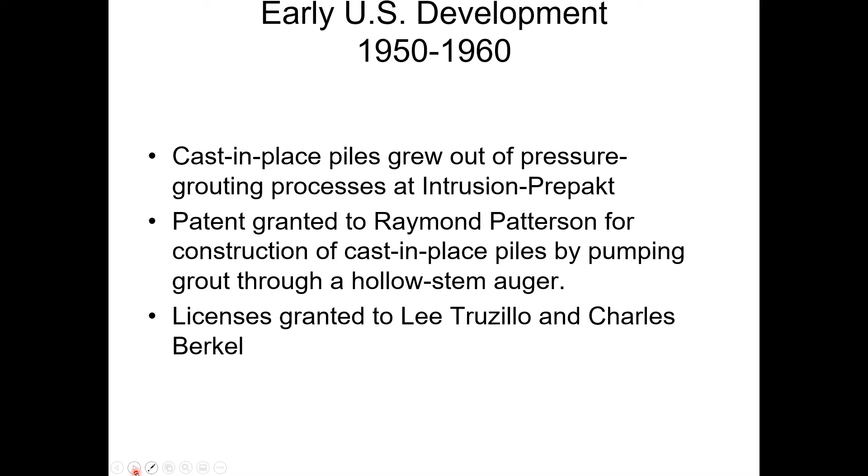So they worked on this process and determined it would be better if they could pump the grout through the center of the augers. They developed augers that would allow that, and a patent was granted to Raymond Patterson for construction of cast-in-place piles by pumping through a hollow stem auger. Later on, licenses were granted to Lee Truzillo and Charles Berkel, and during that period, the late 50s and early 60s, there were 3 auger cast contractors in the United States.

At the time these piles were coming onto the scene, the augers were advanced by relatively anemic power units, at least by today's standard - they generated about 15,000 foot-pounds of torque. The grout was batched on site using bagged cement, much like you would see a masonry contractor do today. So consistent production of even 3,000 PSI grout was a challenge, and installation of 500 linear feet of piling in a single day was considered a great accomplishment.

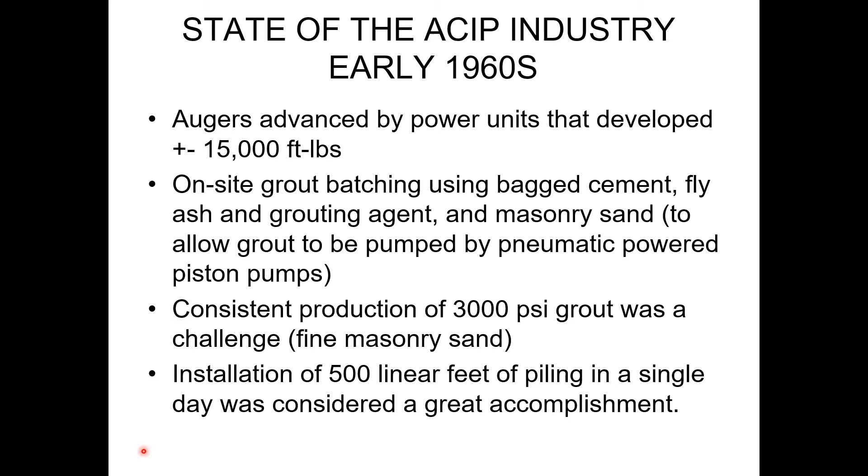At the time the auger pile industry was getting its legs under it, most of the deep foundations for major structures were supported by either driven piles or drilled shafts. Probably most of you in the audience don't remember Raymond Concrete Pile Company, but they had offices all over the United States. They were a driven pile company, and they basically owned several major markets.

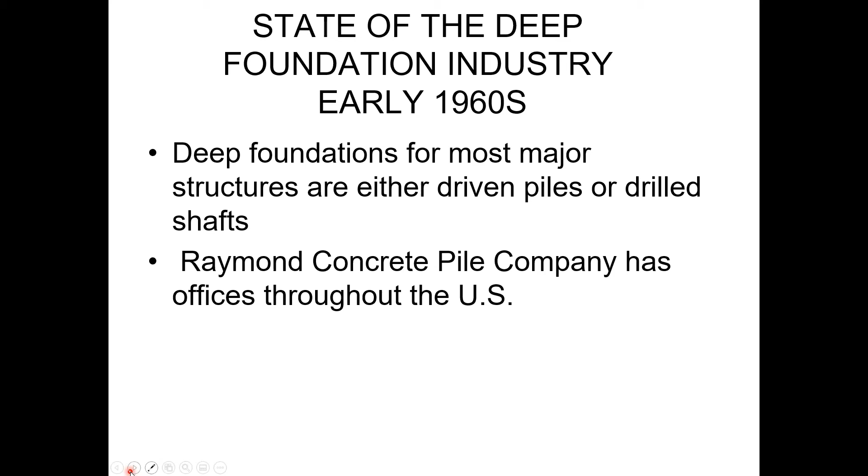Into the 1970s, the augers were advanced by power units that developed around 30,000 foot-pounds of torque. ASTM C-33 sand was used in grout mixes, which made a huge difference in the amount of grout that could be pumped and the pumps available to be used. Ready mix grout was common - any of you who have been on an auger pile site know that it arrives in a ready mix truck, but that only happened really during the 1970s.

For most of you, that may sound like a long time ago, but for me, it's just like yesterday. A significant factor in the 1970s was that the original patent for auger cast-in-place piles expired, and new installers began to enter the market.

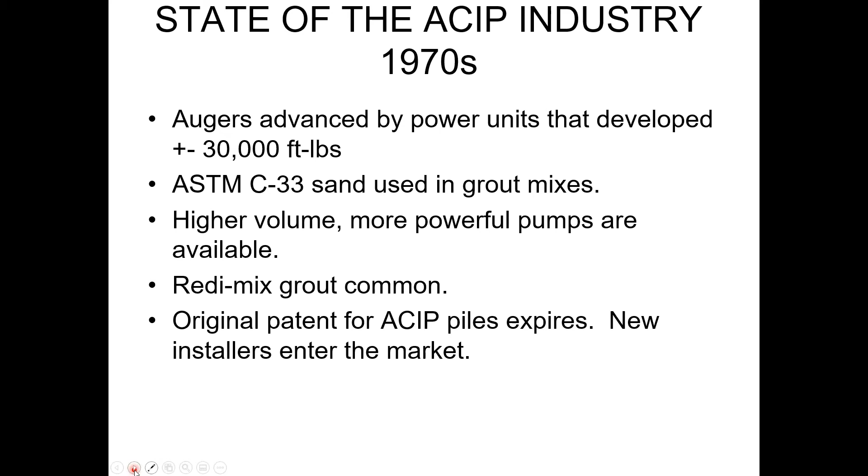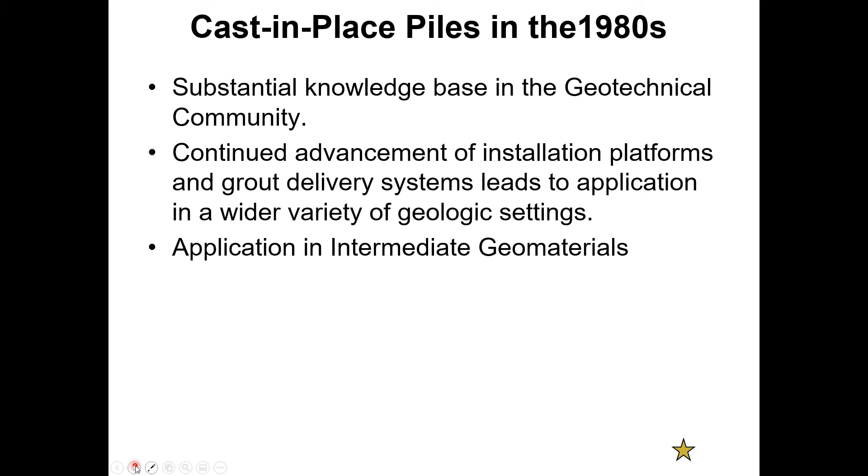During the 1980s, there was a substantial knowledge base in the geotechnical community about auger piles. There had been continued advancement of the installation platform and grout delivery systems, and there began to be applications in what is termed intermediate geomaterials. Two of those applications I'm going to talk about tonight were the Miami Rapid Transit Systems, which were piles extended into soft limestone, and the Georgia World Congress Center, which were installed into partially weathered rock.

Both of those projects were done with conventional crane-mounted equipment. Those were not necessarily the first projects installed into intermediate geomaterials, but they were landmark projects in their area, and those areas were large metropolitan areas. So they sort of served as a springboard for the use of auger piles in intermediate geomaterials.

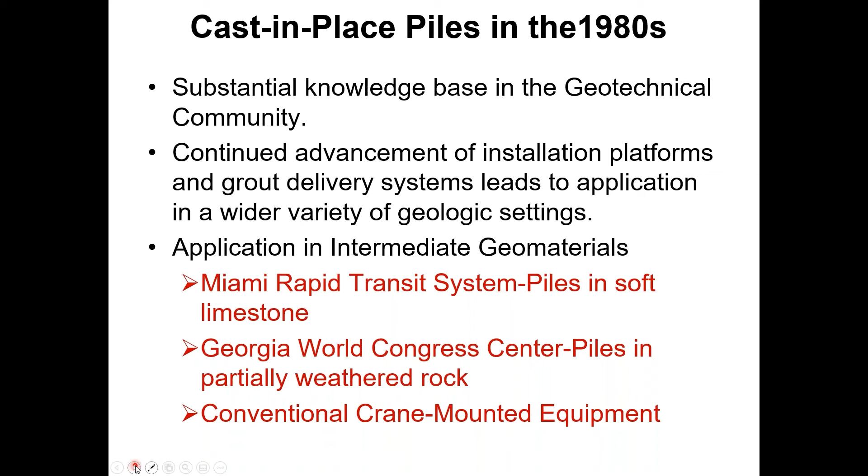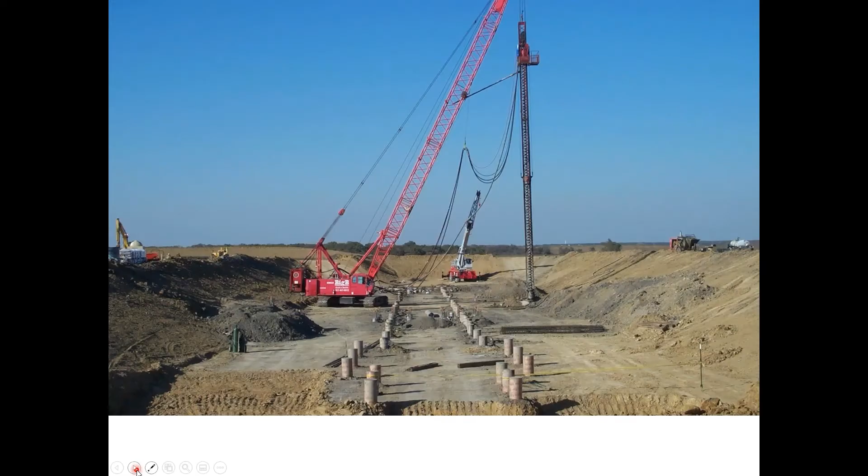For any of you who have been on an auger pile site, you know what the pile and equipment look like. There's a crawler crane with a set of leads mounted on it, and continuous flight hollow stem augers. There's a pump to the side through which grout is pumped into the pile stem, and that's how the filling gets accomplished. I included this photo because it's a good clean shot of a very large piling rig operation, showing how a conventional auger pile setup looks today.

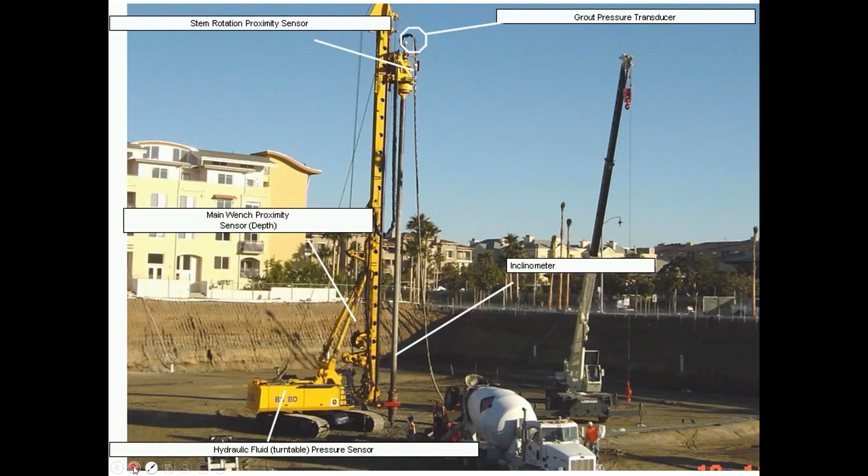Beginning in the early 1990s, some European systems came into the US market, and they were fixed mast platforms that looked like the one in this photo. They had a couple of features significantly different from the swinging leads crawler crane mounted platforms I showed previously. Obviously a fixed mast here, mounted on a power system that is still crawler mounted, but these rigs were developed in Europe beginning in the 1960s for use with European screw pile systems, which were significantly different from what was going on in the United States.

One of the things that came over with these systems was data acquisition processes that really were not being used much in the auger pile industry. In the auger pile industry, most of the focus was on the grouting operation, and by that time we had flow meters of some sort which had been improved, but the data acquisition systems in these fixed mast rigs were a significant difference from what had been going on.

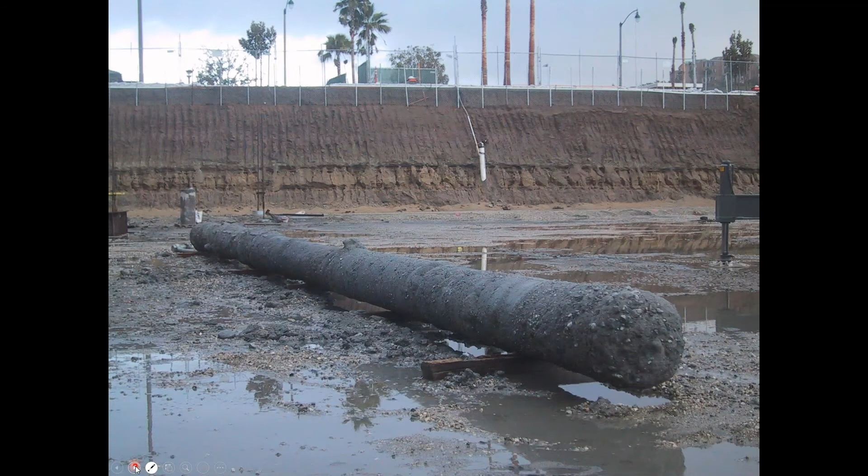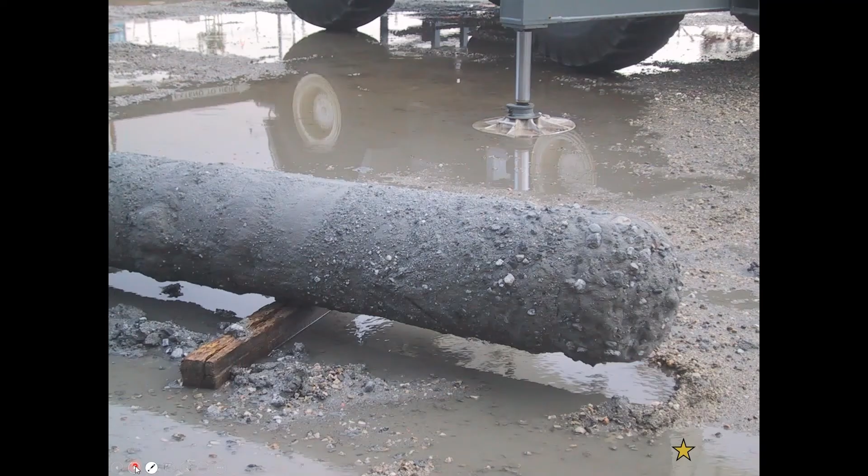This photograph was from a piling operation at the old Howard Hughes Airport in Los Angeles County, the first cast in place system used in that county. The building officials required that we exhume a pile so they could look at it and make sure it looked like a pile, and this is it. All the standing water is from the jetting operation used to get this pile out of the ground. After it was exhumed, I was happy because it shows up close and personal what the interface between cast in place piles and the adjacent material looks like. There is no smooth interface, and you can actually see the material adhered to the pile.

This is one of the reasons why cast in place piles can develop such high shaft resistance - you're not limited by the resistance that can be developed at the interface. The failure surface, or the movement, actually occurs in the soil adjacent to the pile.

Those installation platforms that came over from Europe were significant in terms of the torque available - 150,000 to 200,000 foot-pounds, and that's a plus because these units are being improved all the time. I'm not sure 200,000 foot-pounds is even near the maximum torque now. The other significant item was that they could develop 40 to 80,000 foot-pounds of crowd, or downward force, on the tooling, which cannot happen with conventional crawler crane mounted rigs. The only downward force you have there is the weight of the tooling itself.

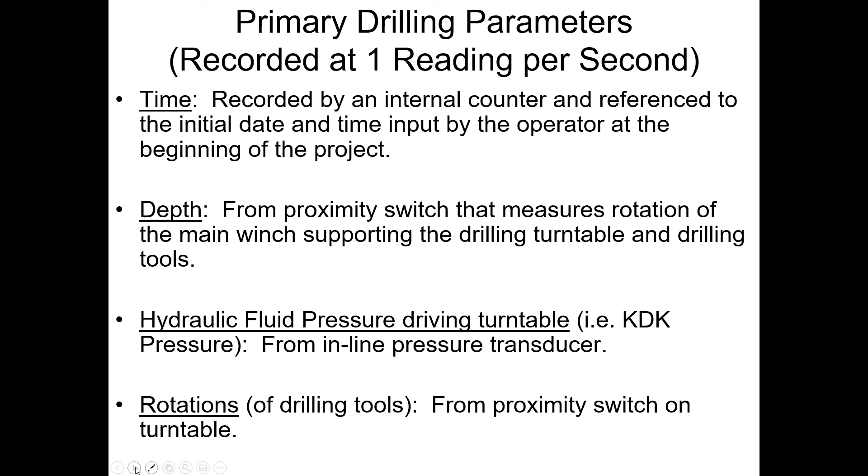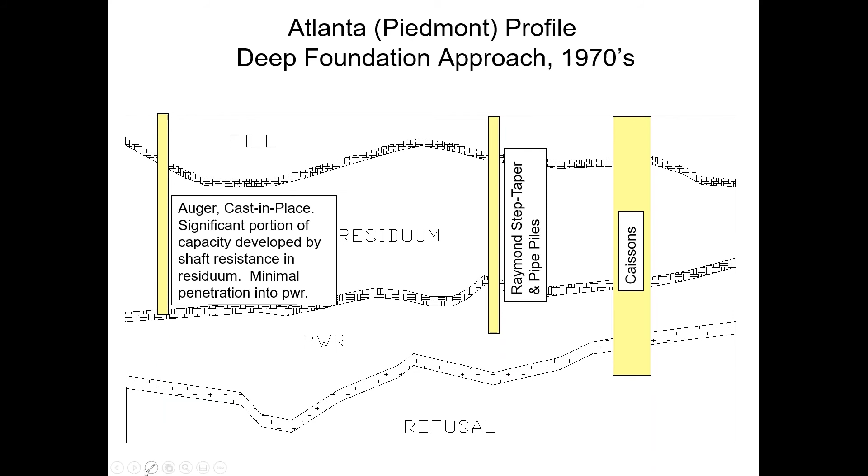Once those processes were developed, then the auger cast in place piles begin to displace the other systems. I'm not saying Raymond went out of business, but there are driven piles that are used in the Atlanta area, and certainly caissons are still used. But the go-to deep foundation system in the Atlanta area and a large segment of the Piedmont is now auger cast in place piles, because they can penetrate into that partially weathered rock, sometimes go down to hard intact rock. So that was a significant item in the Atlanta area and in the Piedmont in general.

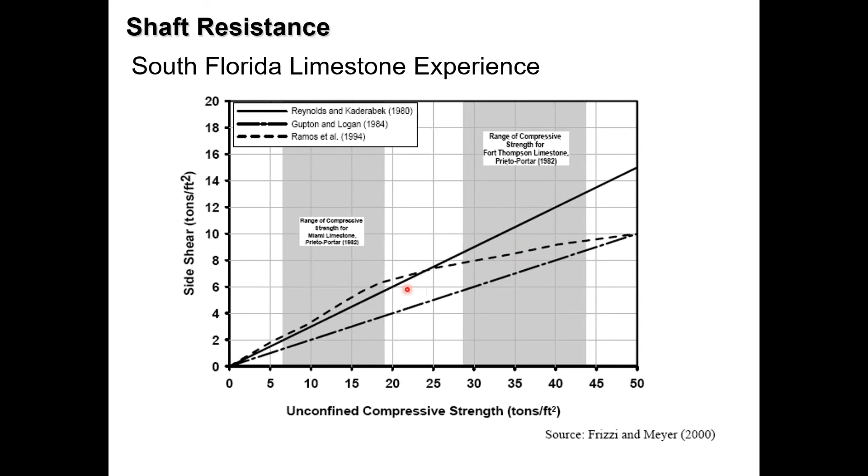This is a chart of side shear in tons per square foot versus unconfined compressive strength. Recall that it is difficult for most intermediate geomaterials to get a sample that you can take to the lab and test to determine the unconfined compressive strength. But in this case, that upper limestone, we were operating sort of in the 2 to 6 TSF range for side resistance. Down in the Fort Thompson limestone, we are operating in the 6 to perhaps 10 TSF range for side resistance. So you can see the advantage of being able to penetrate this intermediate geomaterial, get down into the Fort Thompson formation, in terms of the capacity that you can develop.

If you take that along with the fact that it's very difficult to get an intact sample that you can test, that's why intermediate geomaterials can be such a conundrum, not only for the cast in place pile industry, but also for the drilled shaft industry.

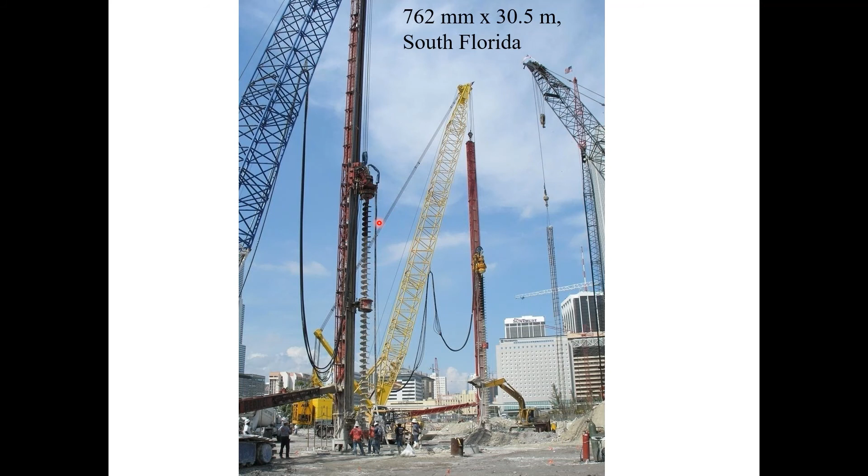Just a photograph of a couple of rigs on a project in Miami. I think these were roughly 2.5-foot diameter piles, being extended down about 100 feet. This particular power pack here is a conventional auger pile power pack. This one, this contractor got clever and extracted the turntable from one of the fixed mast European rigs and mounted it on a swinging lead operation.

So this one here has a lot more torque than this one. And you know, these contractors are clever. They want to do whatever they can to make a buck, and that's just a prime example.

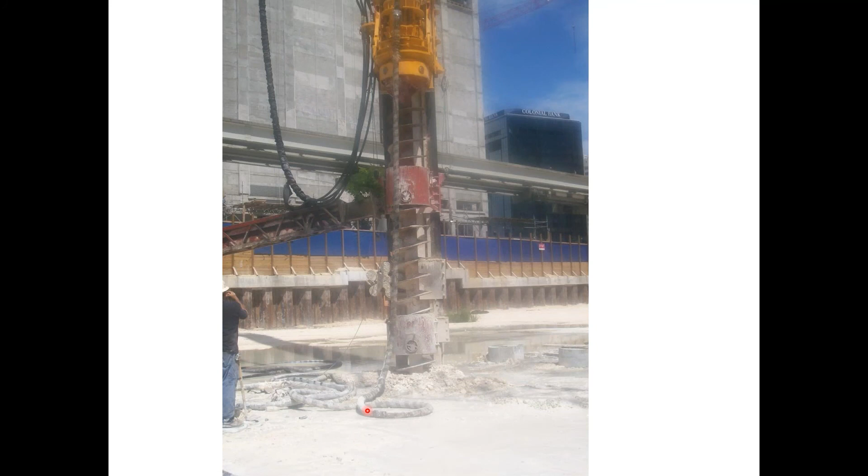Just a photograph of what you see as the piles are being extended. Again, this is the European fixed mast rig turntable that was mounted on an auger pile rig. Just a lot of white material coming out, and a lot of times it's in the form of just gravel.

Just a photograph of one of the cutting heads that was designed specifically for an IGM application. Again, what usually happens is the contractors develop these first, and they get manufacturers to come along and mass produce something like this, although some contractors prefer to use their own equipment.

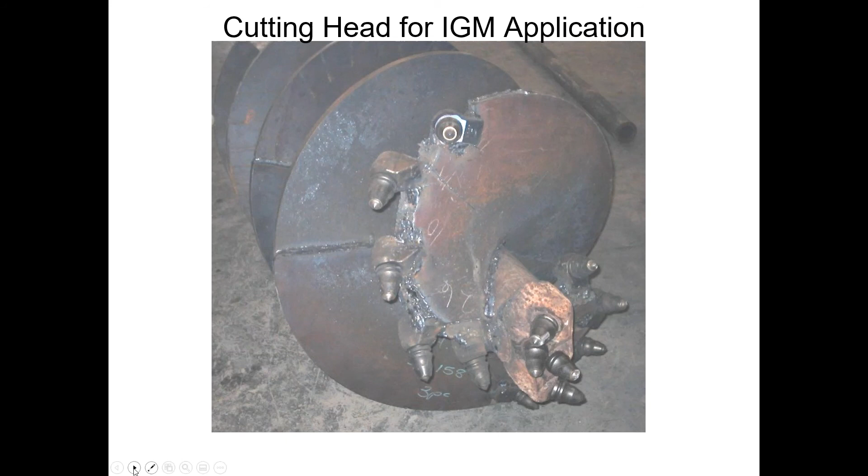So what about shales? One of my favorite materials to work with. Highly dependent on local geology. That's a new thing for geotechnical engineering, isn't it? But shales are just that - they depend on the local situation, and I don't think you can take information from one geologic formation and extend it to another. So it is highly dependent on local geology.

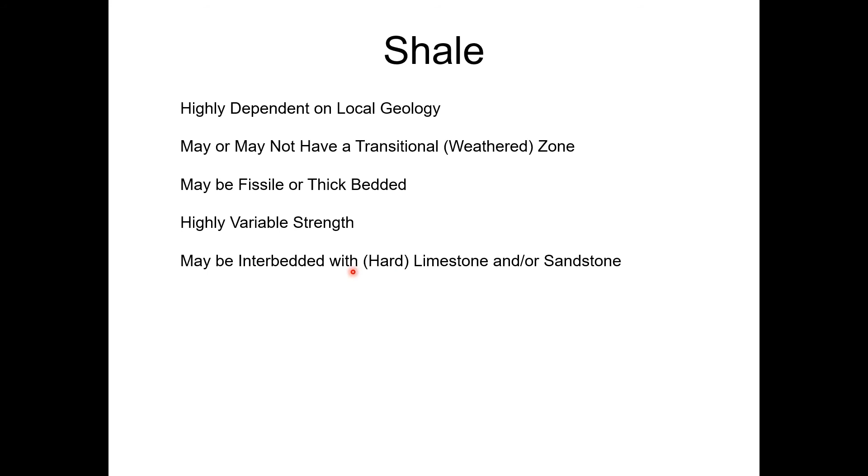They may or may not have a transitional or weathered zone in the shale profile. Can be fissile or thick bedded, highly variable strength, and may be interbedded with hard limestone or sandstone that really can't be penetrated with the conventional auger cast in place pile equipment.

So for me, a good place to start when looking at shales is GEC, Geotechnical Engineering Circular number 8, section 5.3.3.3, a paper done by Vipulanandan - he likes to be called Vip, and I appreciate that. This was a 2005 paper that you can find in the ASCE.

But his method is based on the results of 8 load tests for piles socketed into clay shale with unconfined compressive strength ranging from 1 to 30 TSF. Now, those compressive strengths were determined based on Texas cone penetration test correlations with penetration resistance and unconfined compressive strength - another nod to the problems with dealing with intermediate geomaterials.

One of the interesting things about this process is that the capacity is given in terms of pile head displacement. So here are the 8 load tests that he ran. What he does is go in and look at the range over which the relative load capacity is half of the ultimate load. So it goes in at 0.5 Q and looks at this relative displacement value in terms of half of the ultimate load being mobilized.

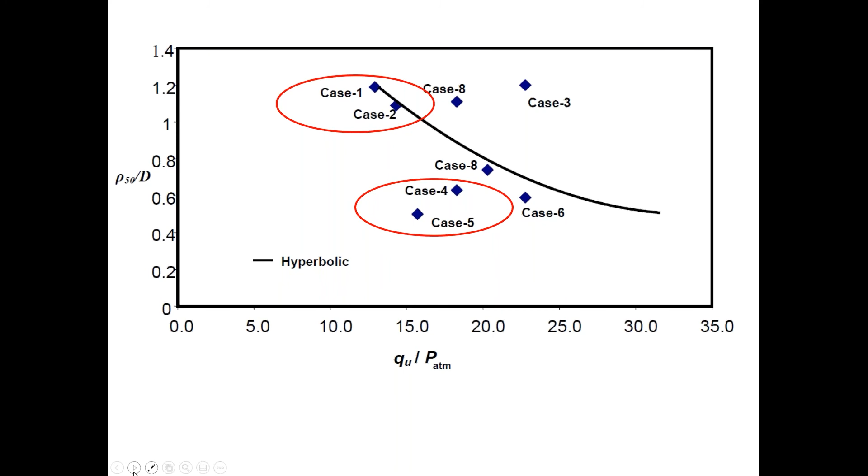If you look at this ratio versus undrained shear strength, or unconfined compressive strength excuse me, cases 1 and 2 are on the upper end. Cases 4 or 5 are kind of maybe in the middle here. All of that to say is I couldn't make any sense out of either socket length or unconfined compressive strength in terms of how these materials perform.

But I do like the system, and I do want to point out this feature right here, and that's the minimum recommended L over D socket length for Texas Department of Transportation, and that is 3, and that is used quite extensively in the industry for sockets into intermediate geomaterials.

Just an example of using this process. When you first look at it, it seems a little convoluted, but basically here you take a 1.5 foot diameter pile drilled 4.5 feet into clay shale with an unconfined compressive strength of 20 TSF.

You go through the process of solving for this ratio, which is 0.79. There is an equation for ultimate capacity, which is calculated in this case as 267 tons.

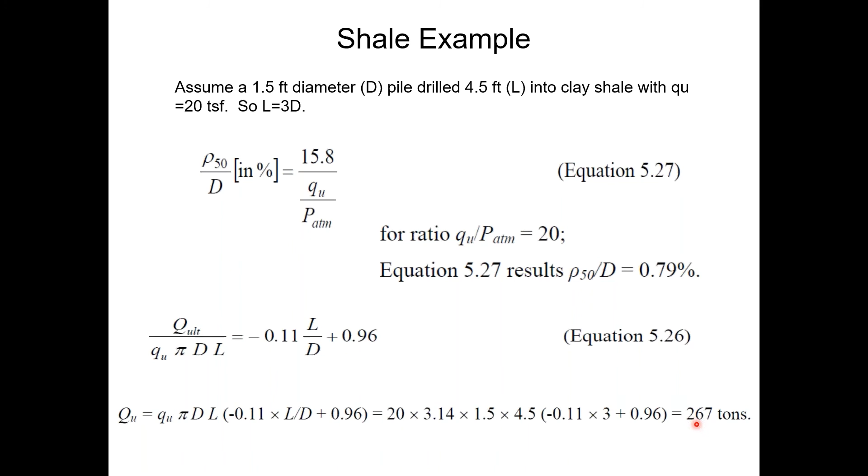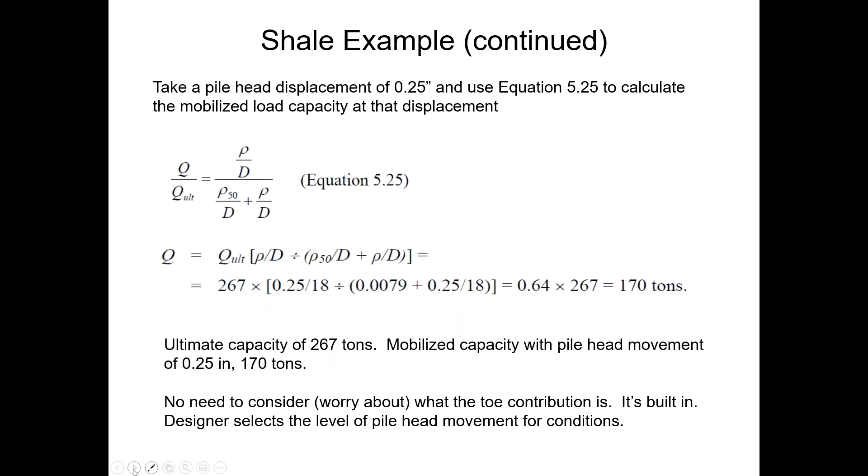The interesting part of this process is you, as the designer, pick a pile head displacement and use this equation to come up with a mobilized load capacity at the displacement you select, not an allowable load, 170 tons at the displacement chosen. One issue with intermediate geomaterials is figuring out how much shaft resistance and how much toe resistance is active at the displacement you'd like to work at. What I like about this process is that it takes that out of the equation, because it's already cooked into the process. You don't have to consider the toe contribution, you just select the level of pile head movement for the conditions you're dealing with.

That is the end of the presentation. Matt, I'll be happy to address questions if there are any.

Our first question was, what is the definition of partial displacement when you're talking about displacement piles, partial displacement piles? I think you'd be a great person to answer that, Willie.

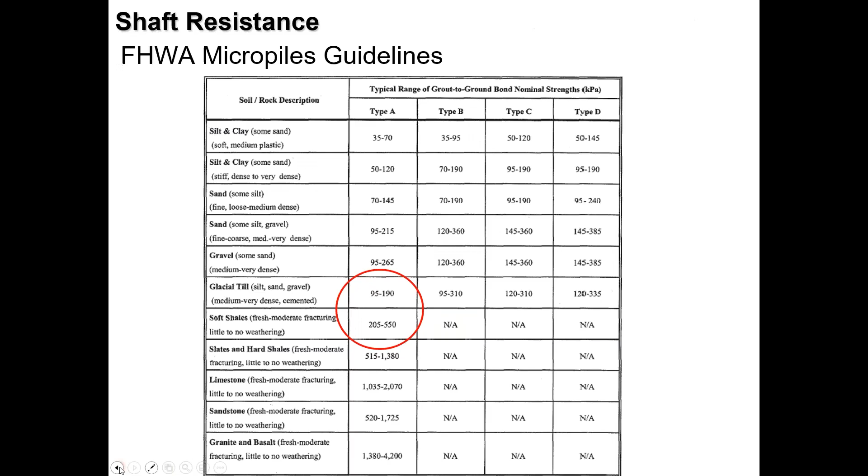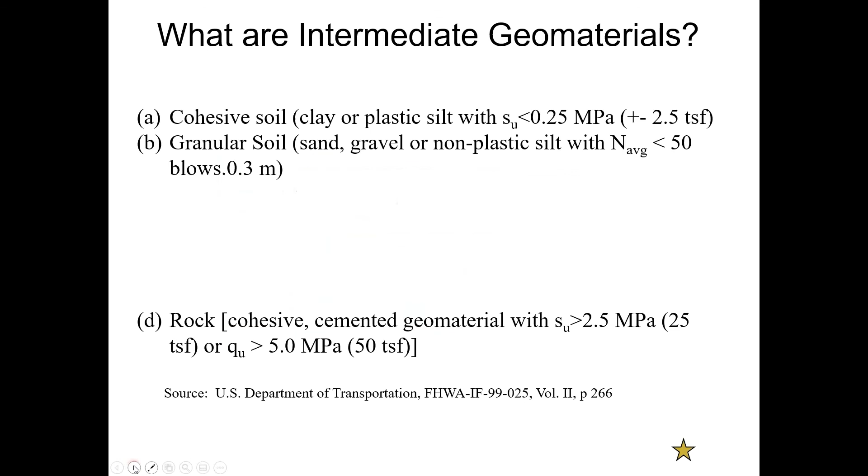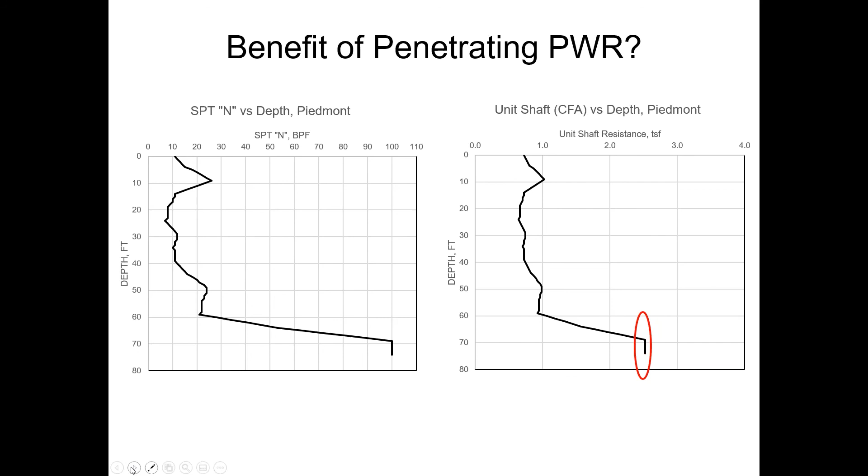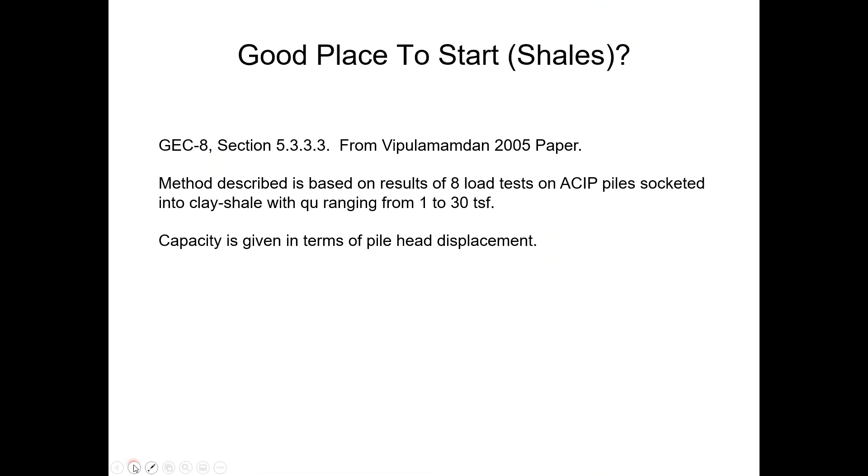I approach this from the standpoint of someone who was in geotechnical consulting for about 25 years, and then went to work for a piling contractor. It was always of interest to me how much of the capacity I thought I was going to get came from shaft resistance versus end bearing.

You can put in strain gauges and try to sort that out, but with intermediate geomaterials, it takes usually so little movement to generate shaft resistance that you may not be able to confidently say how much toe resistance you're generating. In my experience, particularly with intermediate geomaterials, which have a much stiffer response than conventional soil materials, I always was concerned about how much of the capacity I was looking at, the ultimate capacity, if I add shaft resistance and end bearing, how much of that end bearing am I really generating.

One of the things I like about the Vipulamamdan process I talked about is that's taken out - it's already cooked into the soup. You don't have to worry about it. All you do as a designer is select a pile head movement that you want.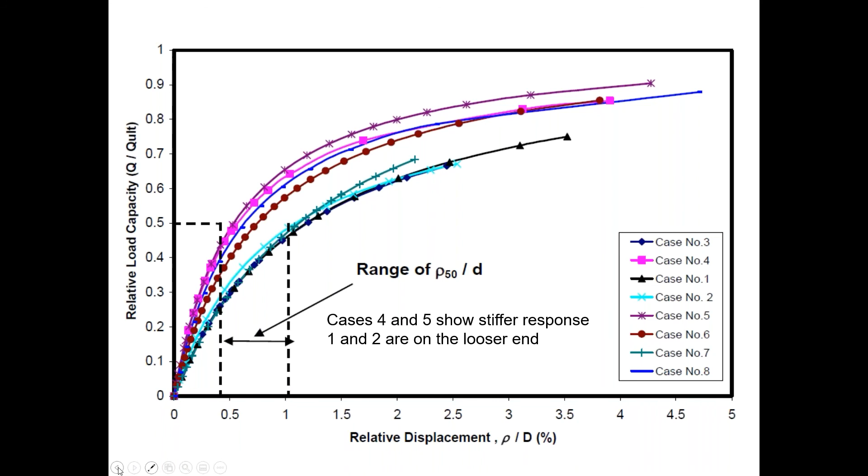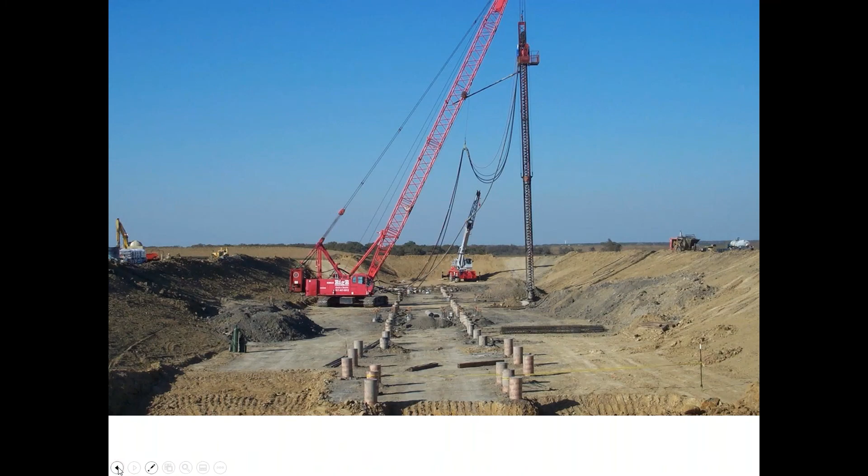And that's important, to be able to sit down in a relatively calm environment and talk to contractors. And I'm speaking with my geotechnical engineer hat on, to discuss problems or potential problems with a contractor and the suppliers. Don't leave those guys out of the equation, because sometimes the material being supplied is the issue that causes the problem. But if you can sit down in a committee room or at a conference with a contractor and supplier and have discussions, it helps. I have never seen anything productive come out of an argument on site while piles or foundations were being installed. So it's much better to get it done ahead of time.